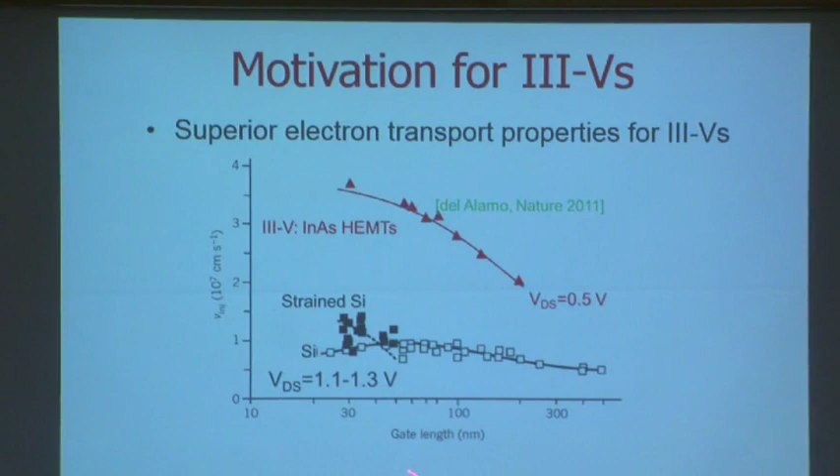Arsenic-containing III-V semiconductors are famous for their superior electron transport property. In a modern deeply scaled transistor, in the perspective of transport, what really matters is the so-called source injection velocity. Professor del Alamo summarized the source injection velocities for III-V channel transistors and strained silicon transistors in this graph. It shows that III-V transistors can deliver more than 2 times the source injection velocity at a reduced voltage. That makes it a very promising candidate for high performance and low power applications.

The device used for the III-V transistor study here is called indium arsenide HEMT. Indium arsenide or indium gallium arsenide are examples of very high mobility III-V semiconductors. HEMT here stands for high electron mobility transistor. It is a type of field effect transistor architecture that has a very similar operation principle as a MOSFET.

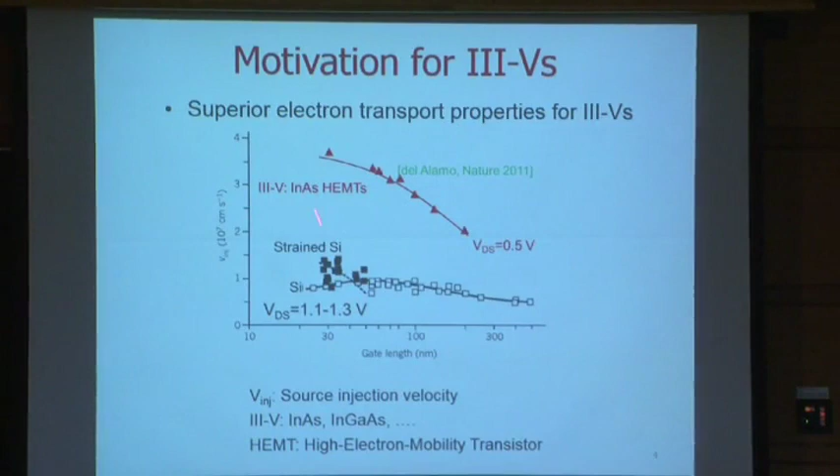Our MIT team has a rich technology heritage in HEMT research. Our alumni have scaled down the HEMT gate length to 30 nanometers, and it was those devices that were used for the study here. But despite the great success as a learning platform for device physics, the HEMT itself cannot be used as a CMOS logic device directly. The reason is here.

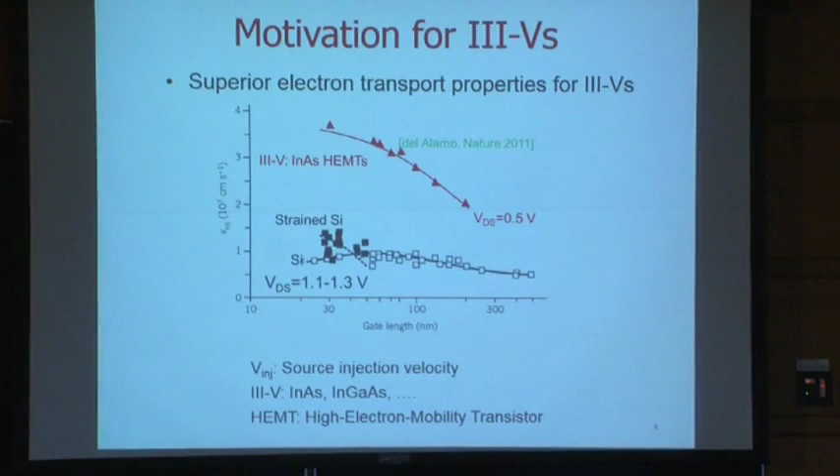Here I show you what a HEMT device looks like. It has a big mushroom gate sitting on top of a wide bandgap semiconductor barrier. It's a so-called Schottky gate. It leaks a lot of gate leakage current.

And the removal of the semiconductor around the gate region is using selective wet etch, leading to a long undercut. The fabrication of the gate stems and the contacts uses gold-based material, and they are using lift-off to make it. And these two components are not self-aligned. So it yields a long device footprint, for example, 2 micron here.

Just as a comparison, here I show you how a modern VLSI device should look. This is an Intel 32 nanometer transistor. Within 100 nanometers device footprint, you will find the self-aligned source/drain, the spacers, and the gates. So if you want, you can put 20 of those devices just at the access region of the HEMT.

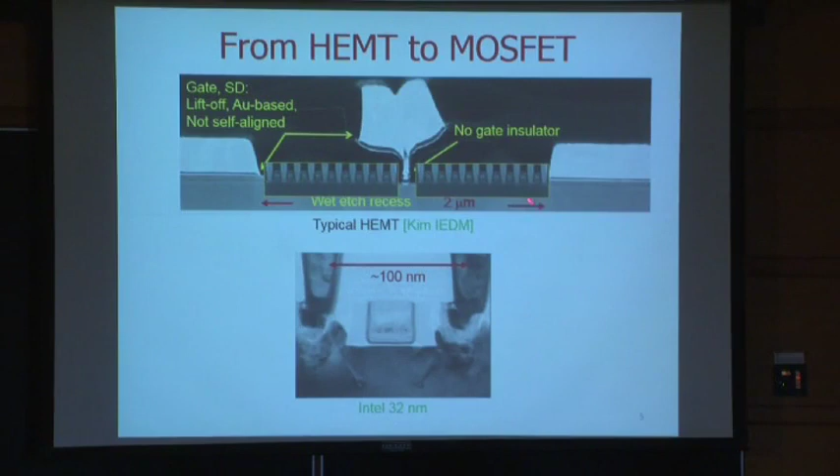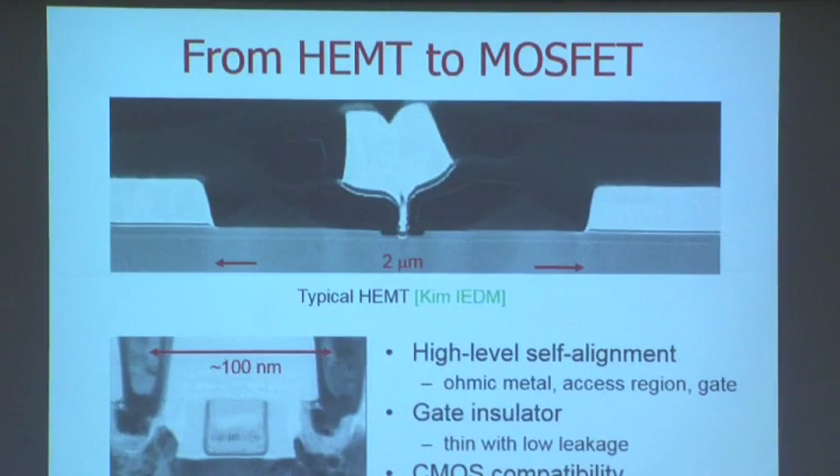So when I came to MIT in 2009, in my first meeting with my advisors, the following thesis goal was proposed by Professor del Alamo. We want to make a III-V device look as much like silicon as possible and feel as much like silicon as possible, but with competitive performance. In order to realize this goal, we want to fully leverage our technology advantage on HEMT research.

For this, let me bring you back to these 2 figures again and identify the key changes we need to make this III-V device look like the one below. First of all, we need to use a high level of self-alignment. We cannot afford to have separate masks for the front end. The ohmic metals, access region, and the gate have to be aligned to one single mask.

Here, I start to have a change of terminology from the silicon convention to the III-V convention. Ohmic metal here is an analogy to the source/drain of a silicon transistor. Access regions are equivalent to the spacers, and the gate is the gate. We also need to integrate a high-quality gate insulator to suppress the leakage current through the Schottky gate.

We also need to scale this dielectric down so that the device will have electrostatic integrity when it scales to small dimensions. And we need to fabricate this device using a CMOS-compatible process because this is targeted for CMOS applications. And for this, we cannot use wet etch and lift-off because wet etch will result in a long undercut. And we cannot use gold either because it's not a CMOS-compatible material.

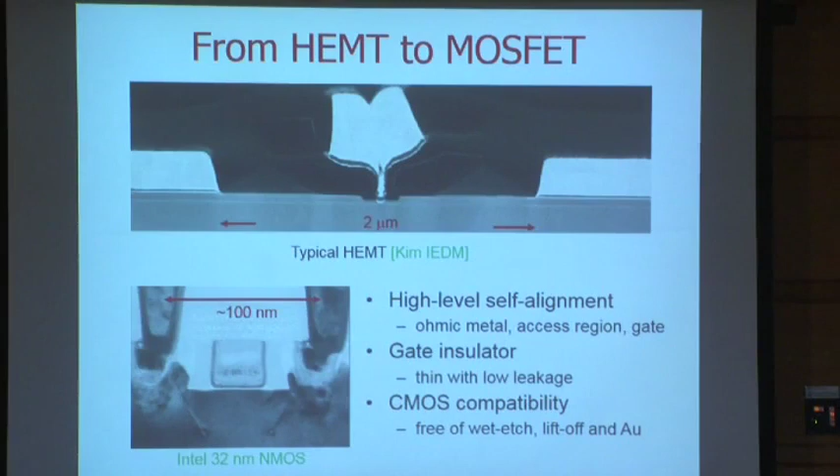So in order to realize those goals, we designed a very special device architecture and fabricated it with a contact-first, gate-last process, which I will discuss in the next section. First of all, I will give you a process overview of how we make this device. The starting heterostructure is grown by MBE from a commercial vendor on the indium phosphide substrate. We carefully design these heterostructures so that we will work with degrees of freedom for our process.

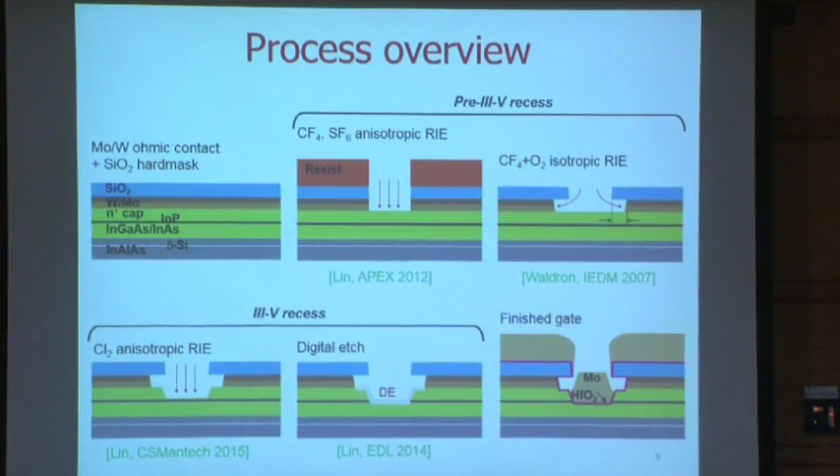And there are a few heterostructures we have grown in the past few years. The one that yields the most successful device has a structure that looks like this. It has indium gallium arsenide, indium arsenide quantum well channels. The total thickness is about 10 nanometers. And on top of it, there's a thin indium phosphide, etch markers for etch stop calibration, and N+ cap. When we receive this wafer, we cleave it into pieces.

And then the first step in MTL is to deposit the ohmic metals, which are tungsten, molybdenum, and a silicon oxide hard mask. I will tell you later why we need the 2 layers of ohmic metals here. Then we perform gate lithography to define the intrinsic region. Using electron beam lithography, we can define this gate line as small as 20 nanometers, which you will see later too. And then we etch the silicon oxide and the ohmic metal, stopping on the III-V.

And then we remove the resist and change the recipe to an isotropic RIE. This allows us to pull in the ohmic metal with respect to the silicon oxide gate edge here, and this is the formation of the access region. Then we perform the III-V recess. This is a new invention in my thesis, and I will tell you more detail of this process.

Basically, you have 2 steps. One is the chlorine-based RIE to partially remove the semiconductor, and then a digital etch to finally reach the surface you want to stop on. Immediately after the last cycle of digital etch, a fresh semiconductor surface is open, and we load it into an ALD system that deposits the high-K dielectric.

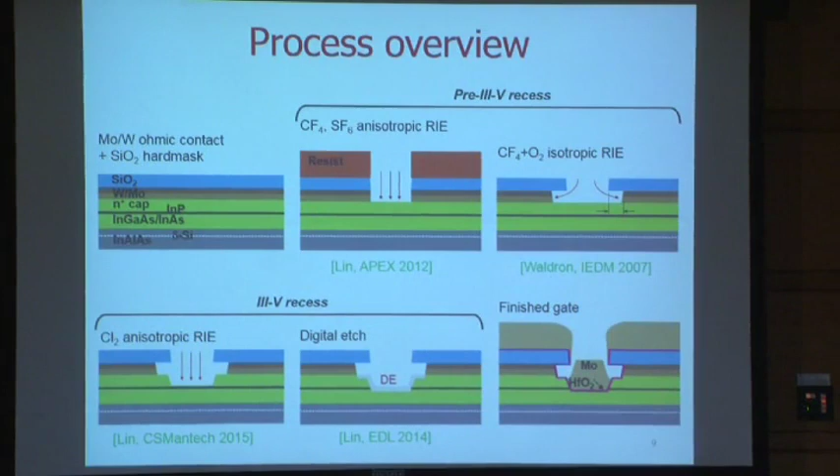After that is the gate electrode evaporation, followed by patterning. Until now, the front-end device is completed. You can see that we only use 1 mask and define all the critical features in this transistor. And after that is the back-end process, which is the via opening and metal line routing. They are not shown here.

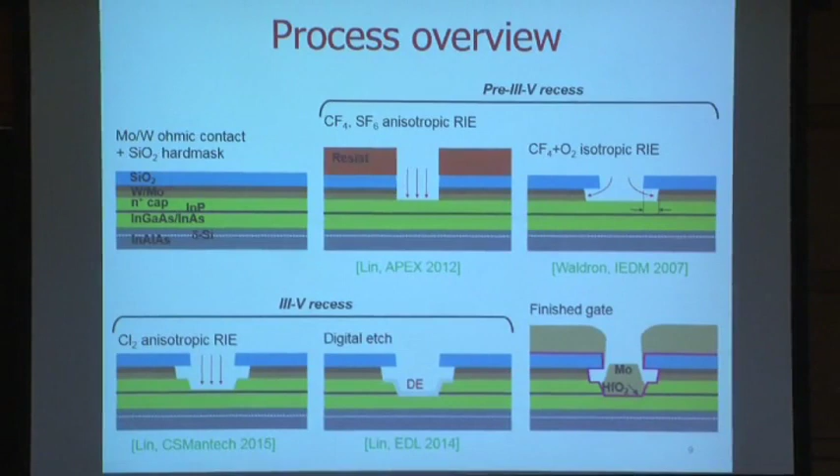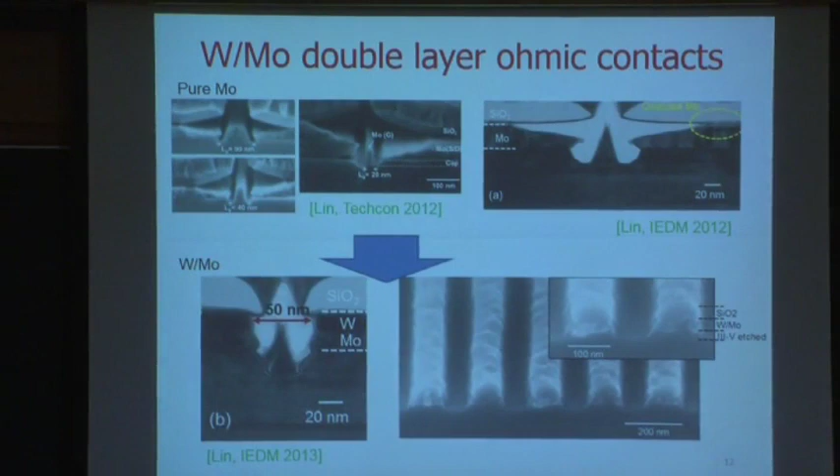Our alumni has developed a very nice refractory metal contact technology on N+ indium gallium arsenide. And in my first generation of device, I adopted that technology and used one layer of moly as the ohmic contact. As you can see, I can scale down the device gate length to a very small dimension, something like 20 nanometers, as early as 2012. But the problem is, we observe a long lateral undercut on the ohmic region here.

We later understood the reasons for this undercut from a TEM. As you can see here, the top layer of the molybdenum was oxidized during the CVD oxide deposition. And this moly oxide was easily attacked by the fluorine-based RIE used to etch the molybdenum in this region. So this results in a long undercut. We explored a few solutions for this problem. The one that works the best is using a very thin tungsten barrier between the molybdenum and the silicon oxide.

As you can see, this device, after adding this tungsten barrier, results in a relatively straight sidewall in the ohmic contact. This allows us to make the contact-to-contact spacing as small as 50 nanometers. So this is a critical technology allowing us to achieve a very small device footprint and also make a tight pitch pattern, for example, the one like this. We use this technology to fabricate tight pitch MOSFET arrays, which you will see later.

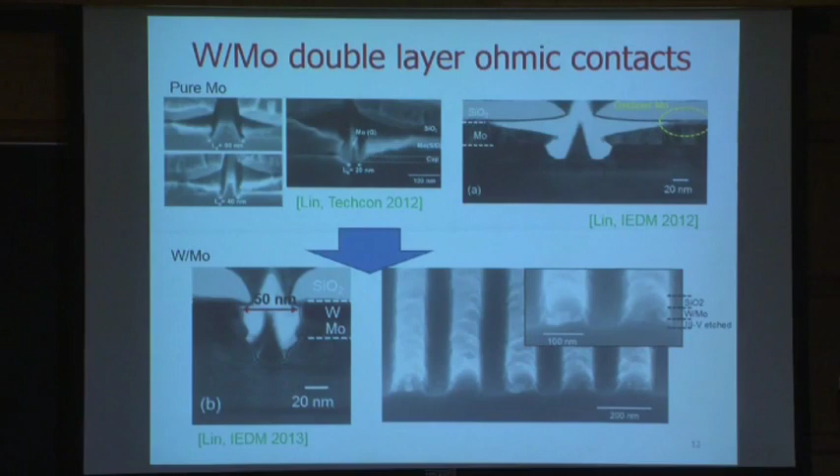Next, I will discuss the recess module. Recess has the same meaning as etching. Pre-III-V recess here refers to the etching of silicon oxide and the ohmic metals. Here, I would like to particularly discuss one technology we developed, which allows us to control this access region in a very precise way.

As I mentioned before, the access region is equivalent to the spacers of a silicon MOSFET. As you can see, this is the spacer. Its function is to separate the gate and the source and drain silicides so that there's no leakage. So it has to be big enough to prevent any leakage path, but it also has to be small enough so that it does not consume any valuable device footprint. This device has a spacer of 15 nanometers. So how do we do it in our MOSFET?

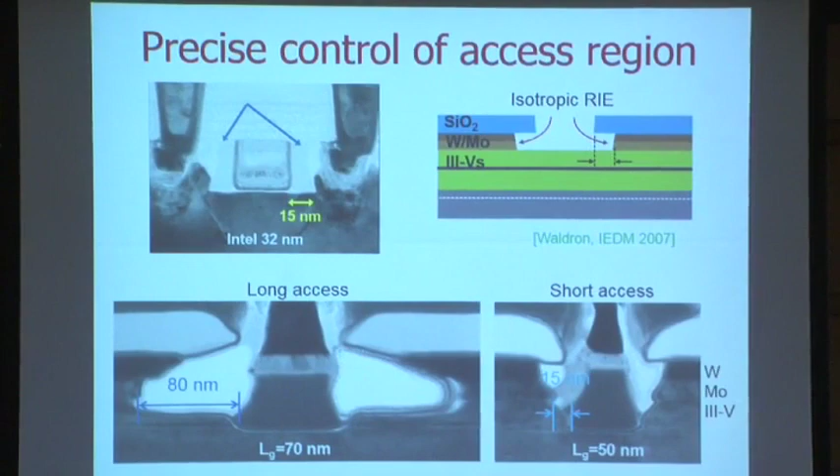We adopt a method first developed by our alumni, Dr. Waldron. The way to do it is using an isotropic RIE. It allows us to selectively etch the ohmic metals, but not the silicon oxide on the III-V, in an isotropic way. By timing this etching, it results in air gaps, as you can see here. And then the gate is put on later, self-aligned to the silicon oxide. Then this air gap will be the spacer, or the access region.

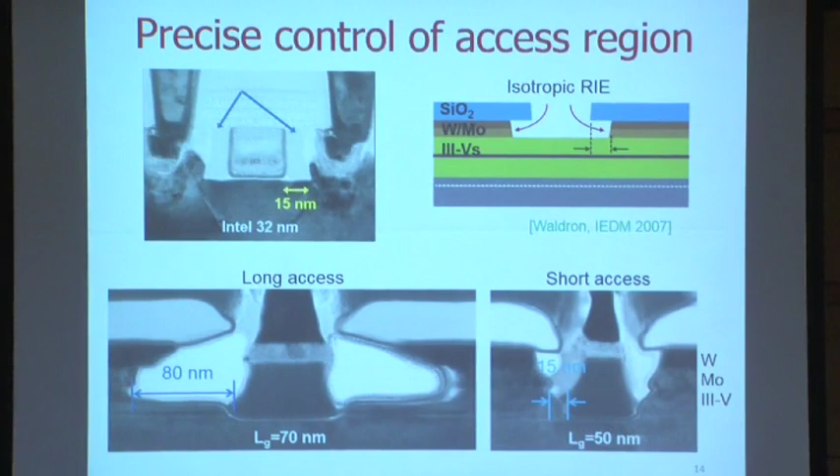Here I show you two examples of this device we have made. For a longer RIE process, we end up with a longer lateral etching, and this is a long access device. And we also tried to explore how small we can make this access region. The best one I can make is 15 nanometers, matching the dimension of a modern silicon device. And this very precise lateral control of the access region also motivated us to think if we can put another device identical to this one right next to itself. This leads to the fabrication of tight pitch MOSFET arrays.

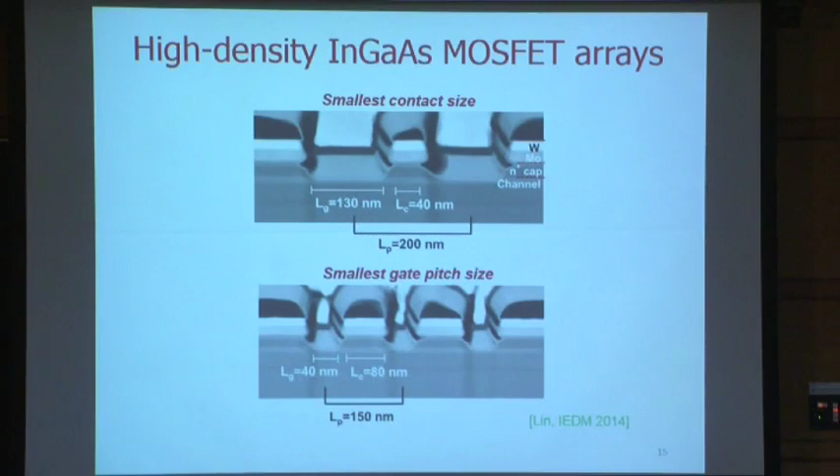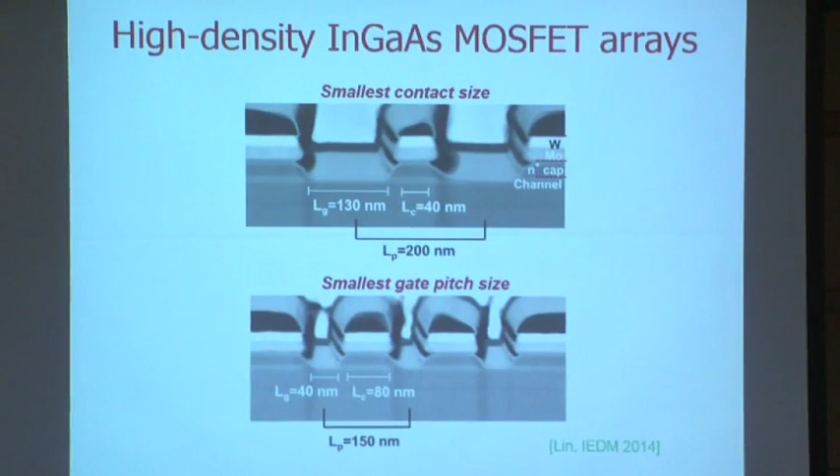And let me tell you that this process is easily integrated into a standard III-V MOSFET fabrication and is fully operational. So by carefully measuring and modeling such a device, you can actually study the nanoscale contact behaviors of such a technology. More details are discussed in this paper. Now I would like to move on to the III-V recess technology. As I mentioned, this is a new invention in this work.

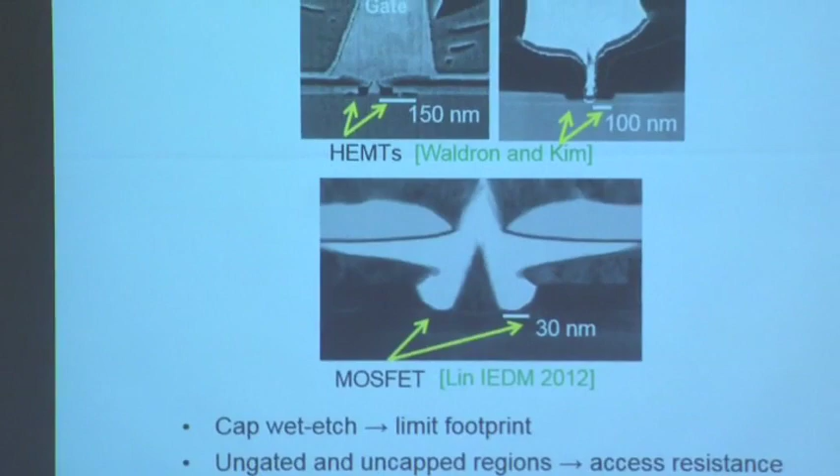Let me first tell you why we want to invent something new instead of using something conventional. Conventionally, the III-V recess in HEMT fabrication uses selective wet etch. As you can see in these 2 devices, it results in a long undercut. For example, it's above 100 nanometers for these 2 devices.

In my first generation of device fabrication, I tried very hard to see what is the minimum we can get by controlling the wet etch time and the solution. Here I show the best I can get is 30 nanometers. But even so, when I presented this device outside, it was still criticized for being an underlap device.

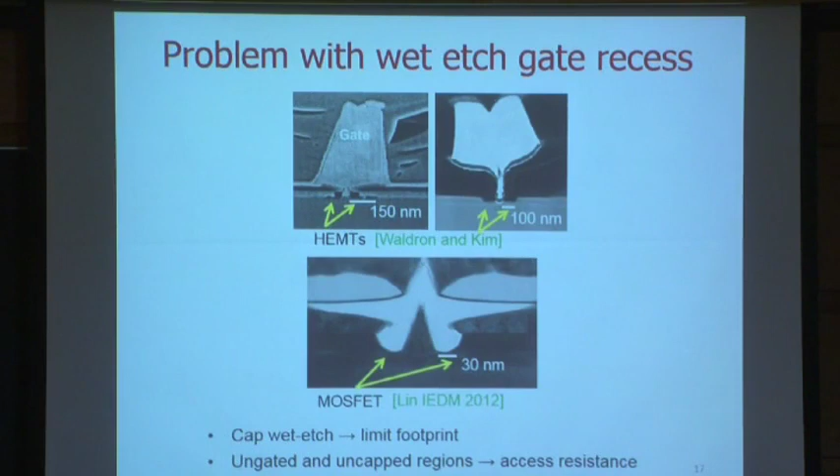An underlap device will consume valuable device footprint, and more importantly, this region is ungated, the gate is not covering, and it's uncapped, the N+ is not reaching here. So it results in a large increase of access resistance. So to solve this problem, we thought very hard about the alternative, and eventually we developed an alternative in this way.

We first use a chlorine-based RIE to partially etch the cap. It results in features self-aligned to the silicon oxide mask here. By carefully tuning this RIE, we can end up with a very smooth surface. And the etch depth is not very critical because later we are going to use a digital etch to gradually find the final terminating surface you want to stop at.

The digital etch technique used here comprises 2 steps. The first one is low-power oxygen plasma to oxidize the III-V surface and form a native oxide. Basically, this is the etcher. The second step is to use diluted sulfuric acid to remove this native oxide. Both of these processes are self-limiting, resulting in about 1 nanometer of material removal per cycle. And the ending surface is relatively flat, qualified for most applications.

One very critical problem in this process compared to a wet etch is that it doesn't have selectivity. Both processes etch the semiconductors of those layers at a comparable rate. This is a problem because if you cannot find the ending surface, it will not be useful. So we developed techniques to calibrate this etching, a fast and accurate calibration allowing us to pinpoint the top layer of the indium phosphide.

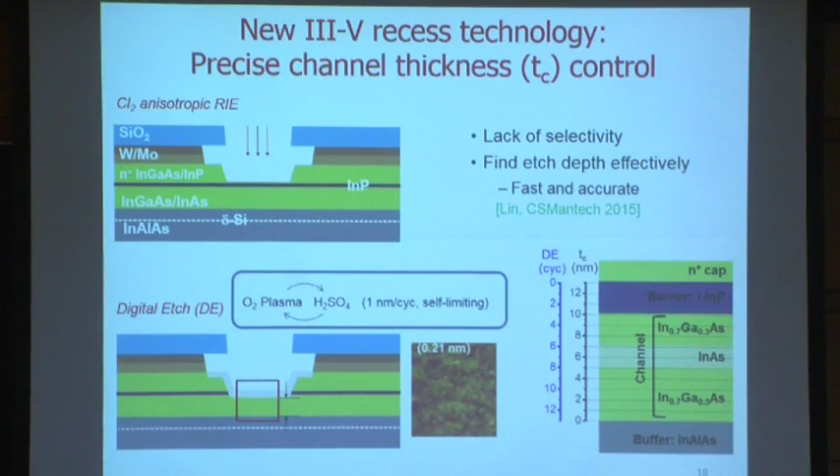This basically makes use of the wet etch selectivity of indium phosphide and indium gallium arsenide against a certain wet etch recipe. The detail is discussed in this paper. If you can pinpoint the indium phosphide, then you have the freedom to control the depth by using a digital etch. As a proof of accuracy, I show you 2 devices here, fabricated on the same heterostructure. As you can see, the grown channel is 10 nanometers in the unetched region.

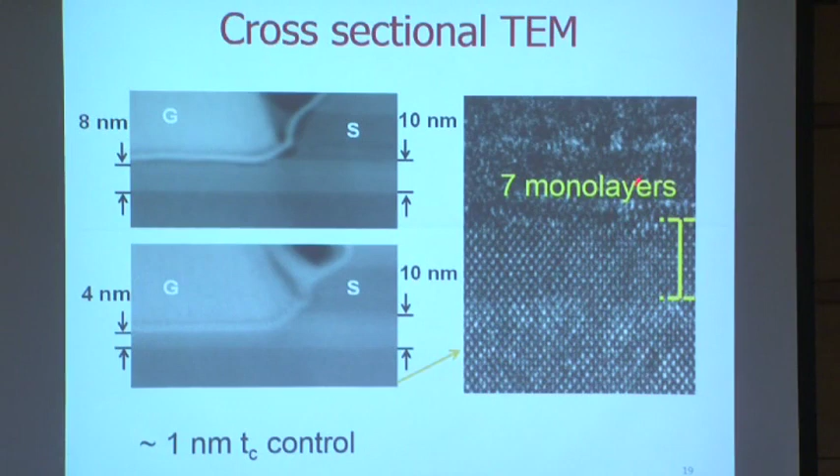By using different combinations of dry etch and digital etch, you can end up with different thicknesses in the intrinsic gate regions, 8 nanometers and 4 nanometers, as shown. If you zoom in to the 4 nanometer channel intrinsic region, you will see exactly 7 monolayers of atoms left behind, proving the accuracy.

Now we have the contact, we have the recess. The last ingredient to make a MOSFET is the gate stack. We have gone through several generations of gate stack engineering. The first generation used a relatively conservative design, a thick aluminum oxide on thick indium phosphide, resulting in an EOT of 3.5 nanometers. EOT stands for equivalent oxide thickness. It's calculated from the physical thickness of these 2 materials and their dielectric constants.

I was very excited when I got this device because it was the first decent working device after 2 years of process development. And more excitingly, this device has a very low leakage current, allowing us to scale the EOT down. In the next generation, we fabricated a gate stack like this. We use a higher-k material, hafnium oxide, on top of a thin aluminum oxide on the indium phosphide. The indium phosphide is also scaled down, resulting in an EOT of 0.9 nanometers.

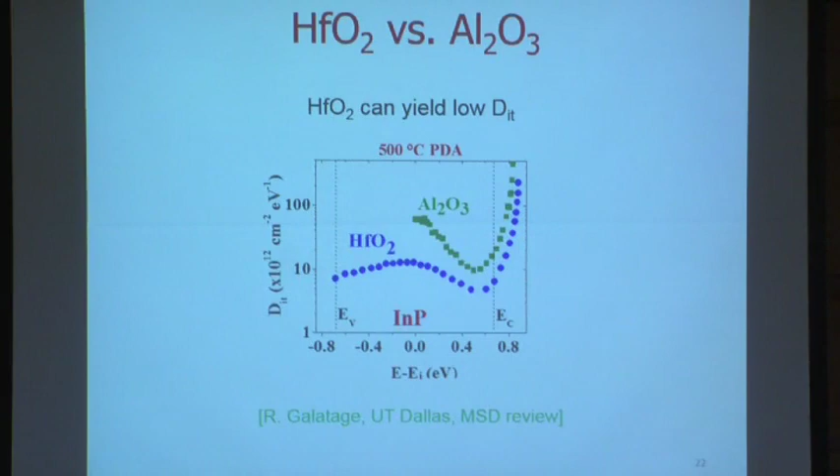This research has greatly benefited from multi-university collaborations. Here is one example. In the MSD review, we learned from our colleague from UT Dallas that hafnium oxide itself can also form a very good interface on III-V. So this information was quickly fed back to our fabrication. And then in our next generation, we removed the aluminum oxide interfacial layer and directly put hafnium oxide on indium phosphide. The resulting EOT is reduced to 0.6 nanometer.

Now coming to the next generation, we want to solve another problem, which is that all VLSI devices are surface channel devices. The invention of our new III-V recess technology allows us to stop at any III-V surface that we want. So we can remove the indium phosphide by using digital etch, and then we directly put hafnium oxide on the InGaAs channel. Here resulting in another EOT reduction.

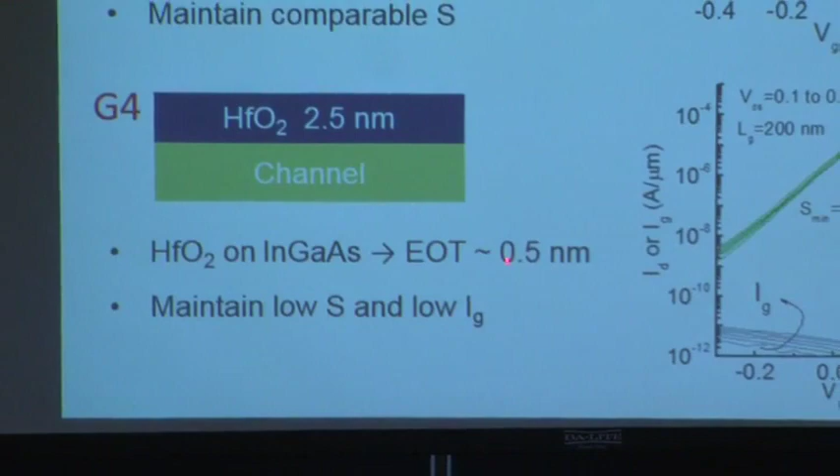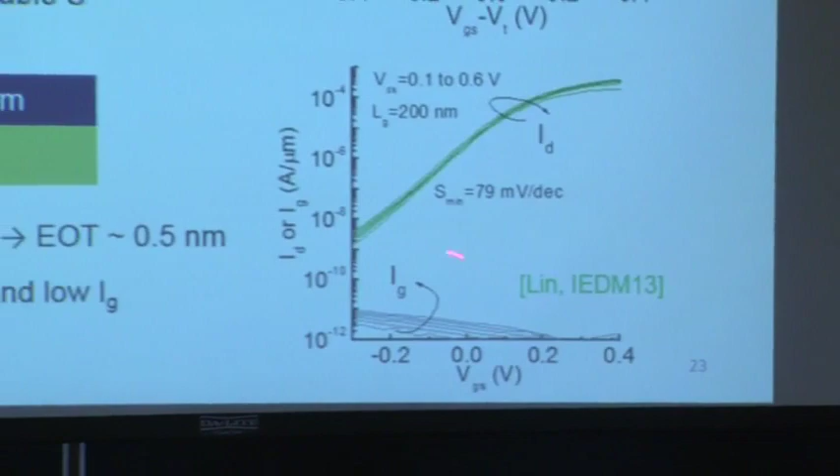Even though we have used dry etch in the intrinsic regions extensively, you can see that this device still results in relatively good subthreshold swing and high drive characteristics. Also, the gate leakage current, even though we use a very thin EOT, is still very good. So this is our latest technology in gate stack.

Just as a recap of the fabrication technology. In the quest for higher device performance, we persistently introduce new features to our fabrication. Over these years, we have performed 4 generations of intrinsic engineering, which bring down the EOT to 0.5 nanometer. And over these years, we used 4 generations of extrinsic engineering and brought down the source resistance to 100 ohm micron. Since this is my 6 years at MIT, on average, each generation is taking about 18 months.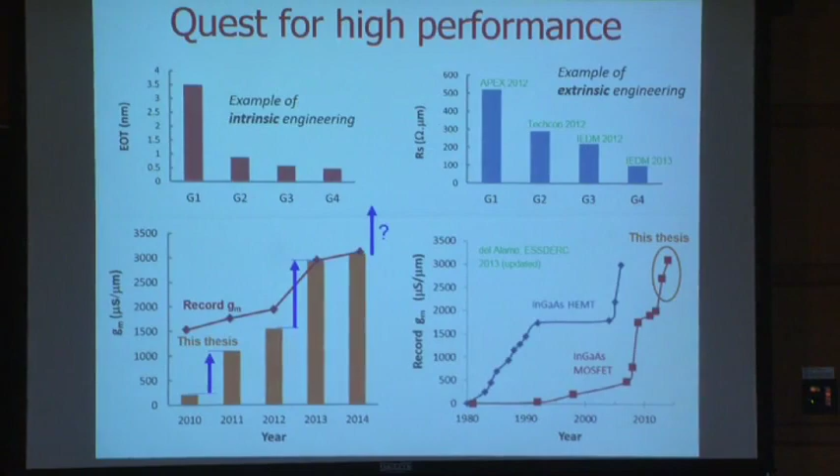Another thing worth noticing is the comparison with indium gallium arsenide HEMTs. You can see that indium gallium arsenide HEMTs have led this performance since 30 years ago. It was only last year that our device surpassed their performance. And I believe this is just the start. The potential of the InGaAs MOSFET has not been fully unleashed. Probably very soon you are going to see another big jump in the performance of InGaAs MOSFETs.

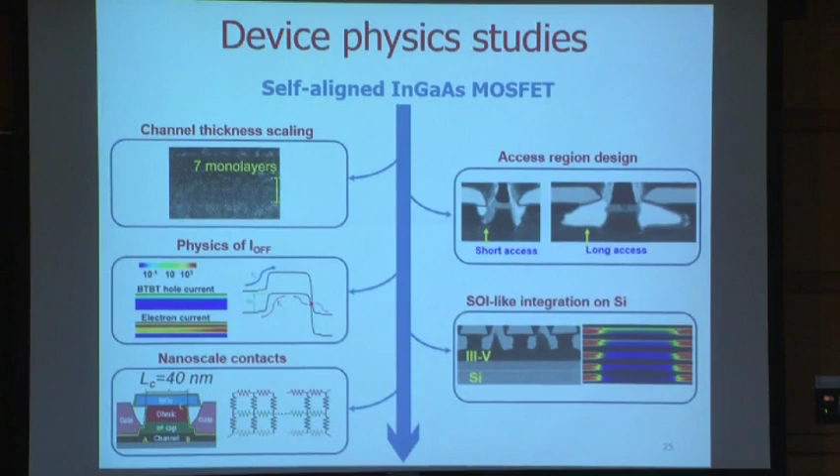The device technology developed in this work also allows us to explore some unknown device physics that are relevant to the operation of III-V MOSFETs. I have done several studies in my thesis, and here is a list of them. Because of time, I do not have enough time to discuss each of them in detail. So I'll briefly tell you what I have done for 2 topics here. The first one is the study of the impact of channel thickness scaling on device performance.

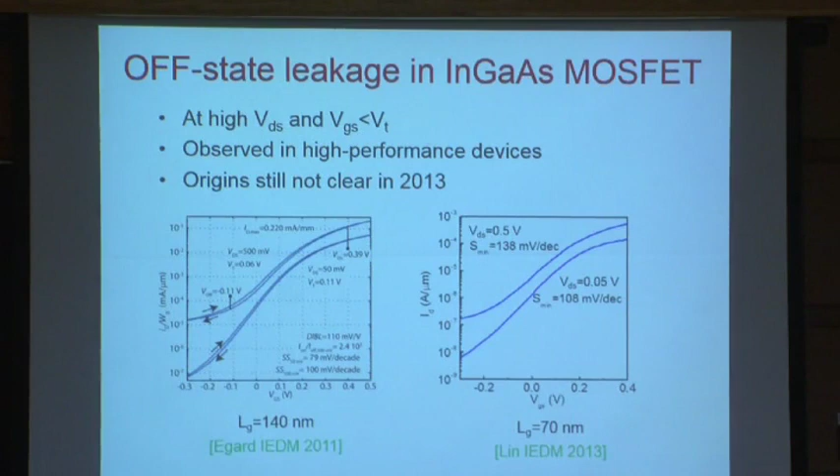You will see that this excess off-state leakage current at this bias condition happens in almost all high-performance InGaAs MOSFETs. Two examples: one is made by Lund University, in this region. Another one is made by myself, in this region. The origin of this off-state leakage current was still not known in early 2013. So our high-performance devices made in 2013 gave us the opportunity to explore this physics.

So what we do is, just like detectives, unpeel the onion layer by layer. We first isolate the effects from the buffer leakage and the gate leakage. And then the next thing we want to isolate is the Fermi level pinning due to DIT. For this, we performed low temperature measurements.

You will see that the subthreshold swing of those devices approaches its ideal value when the temperature cools down to 150 K. This N is defined as the experimental subthreshold swing over the ideal subthreshold swing. If it approaches 1, that is ideal. And it indicates that DIT is frozen at low temperatures. And you are going to see the patterns follow the classical GIDL, which you will see in the textbook. GIDL stands for gate-induced drain leakage.

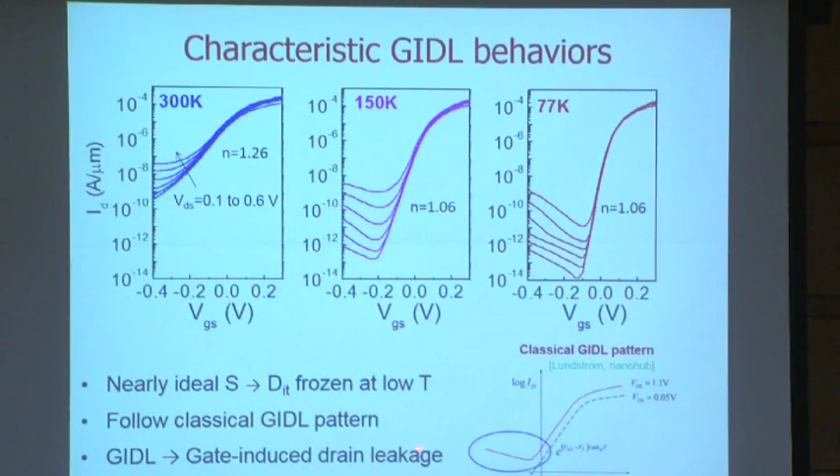Here I explain to you what GIDL is. Classic GIDL happens because you bias the gate at a negative voltage and your drain at a positive voltage. It creates a high E-field region at the gate edge close to the drain. Because of this high E-field, it bends the band and allows a valence electron to tunnel through, and then this electron is collected in the drain. And the hole left behind will diffuse to the source. This constitutes the band-to-band tunneling current.

So we performed bias and temperature dependent studies on this off-state leakage current. It really reveals the characteristics of band-to-band tunneling. So this is the first unambiguous evidence to identify that BTBT is really the triggering mechanism. But is the IOFF entirely due to BTBT? This is the second problem. This is what people really thought in the last years. And we find counter evidence here.

If this current is entirely due to BTBT, BTBT happens only in the high E-field region, so it's a very localized process. So it should not have a dependency on the gate length. But we find a very strong gate length dependency in our off-state leakage current, as you can see here. So it indicates something else is happening. So what is that?

So we found later that this is due to a parasitic bipolar transistor. The operation is shown here. As I mentioned before, the holes generated due to BTBT have nowhere to go because this is a floating body channel. They have to go to the source. And when they go across the source-to-channel junction, this junction barrier has to be lowered, which allows a flood of electrons. This constitutes a large electron diffusion current.

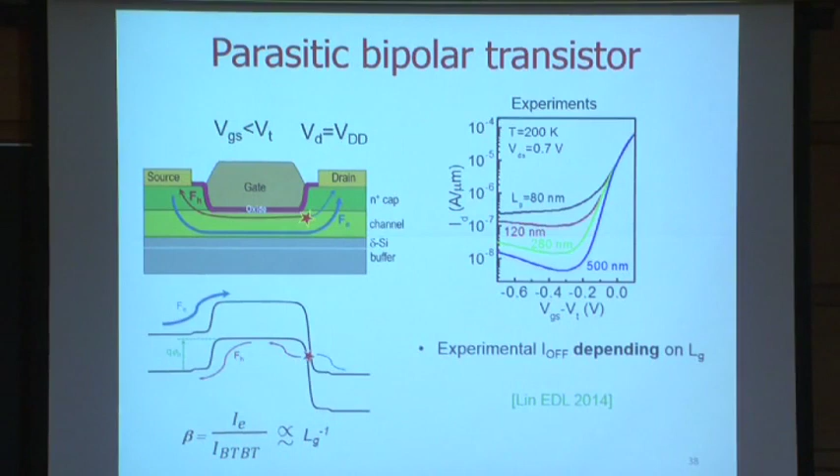And actually we find this dependency embedded in the off-state leakage current observed in this graph. The detail is discussed in this paper. We can even pinpoint the base width modulation from this off-state leakage current in our experiment. Then we later developed models to understand this better. Here is the experiment we observed in our device, and here is the TCAD model we built to understand it. You can see that they end up with a very good match.

There are a few points to take note of here. If you exclude BTBT, then the transistor will just turn off nicely, as shown in the green curve. That indicates BTBT is really the triggering mechanism. Secondly, if you examine the current components in these regions, you will see that the BTBT current is only a very small fraction of it. The majority current is the source electron diffusion current. The gain is about 700.

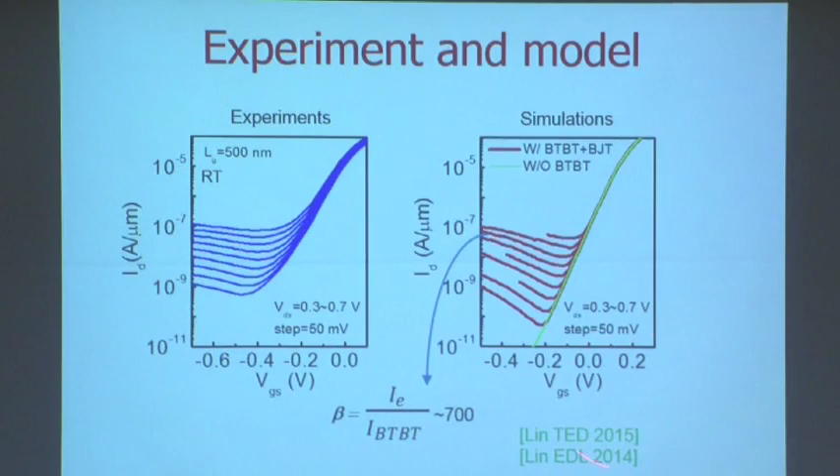This simulation also allows us to explore design considerations to reduce this off-state leakage current. Due to time, I will not discuss it here. As extended reading, you can refer to those two papers. So here I come to my conclusion.

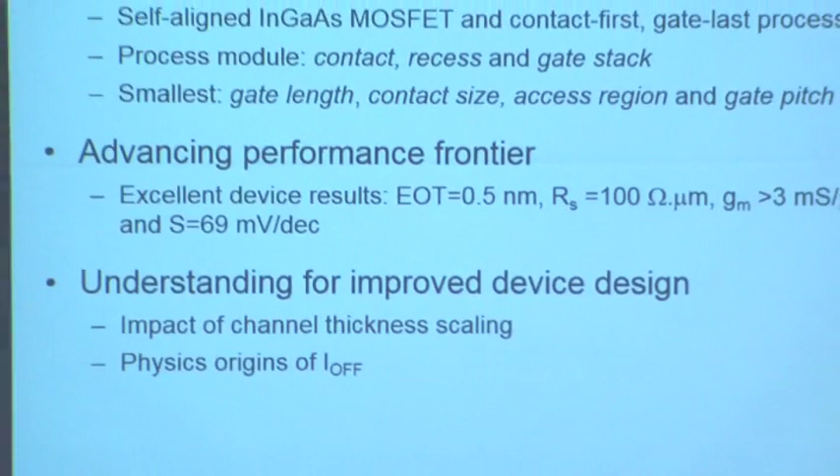Starting from HEMTs, we wanted to take advantage of the HEMT technology we have at MIT. We designed a very special self-aligned InGaAs MOSFET architecture, and fabricated it using a contact-first, gate-last process. Over these years, we persistently introduced new features to our process module, including the contact, the recess and the gate stack. From those, we achieved devices that we can claim are the world's smallest: the smallest gate length, the smallest contact size, the smallest access region, and the smallest gate pitch.

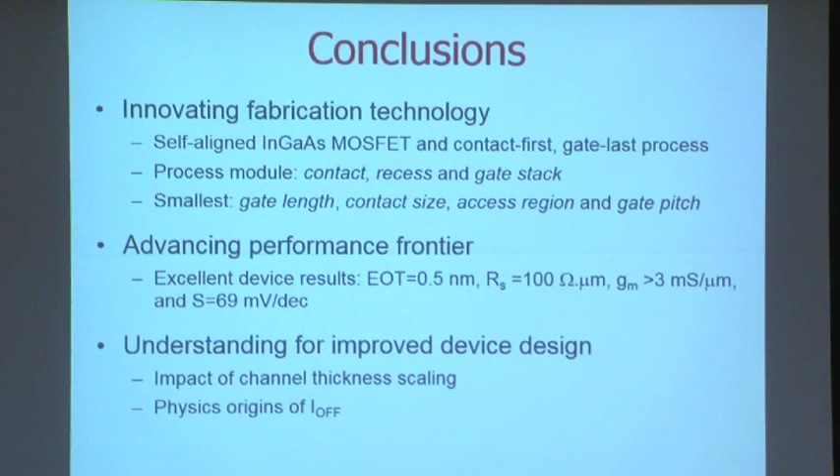Due to these advances in fabrication technology, we're also advancing the performance frontier of InGaAs MOSFETs. We have achieved certain very impressive figures of merit. We have achieved an EOT of 0.5 nanometer, a source resistance of 100 ohm-micron, and a record transconductance above 3 millisiemens per micron, the first time in an InGaAs MOSFET, or in any III-V field effect transistor. We also achieved the second best subthreshold swing, 69 millivolts per decade.

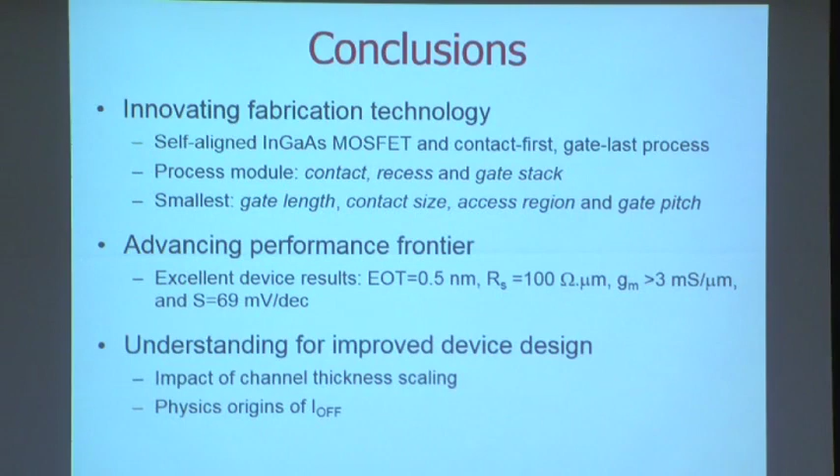The advance of the device technology also allows us to study some underlying physics in III-V MOSFETs. I give you two examples here: the impact of channel thickness scaling on III-V MOSFET characteristics, and the physical origins of the off-state leakage current in high-performance InGaAs MOSFETs that has bothered the community for a long time.

Here are some future works that I will propose for this project. First of all, I've placed relatively less emphasis on interfacial characterization in my thesis. I was asked this question many times at conferences and in emails, so this is a very important question. Given that our intrinsic gate region has been subjected to many RIE processes but still maintains very good electrostatic integrity and subthreshold characteristics, this is a very interesting problem to explore.

But due to our very special quantum well architecture, we will need to carefully decide the layout and the devices to be tested for this study. We also need to develop some new models. For this, a new model developed by Warnock before is the first step to explore this problem. And there's a second problem.

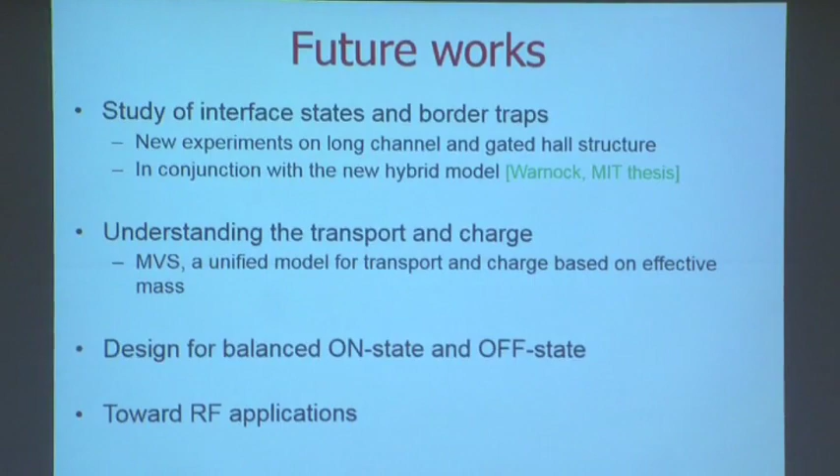Recently in the community, there's increasing discussions about the charge control in the III-V channels versus its transport property. Because of the low density of states in the III-V, this might dilute the advantage of the high transport property of this material system. Most of those works are theoretical, so I have a feeling that the experimental work on this subject is lagging behind.

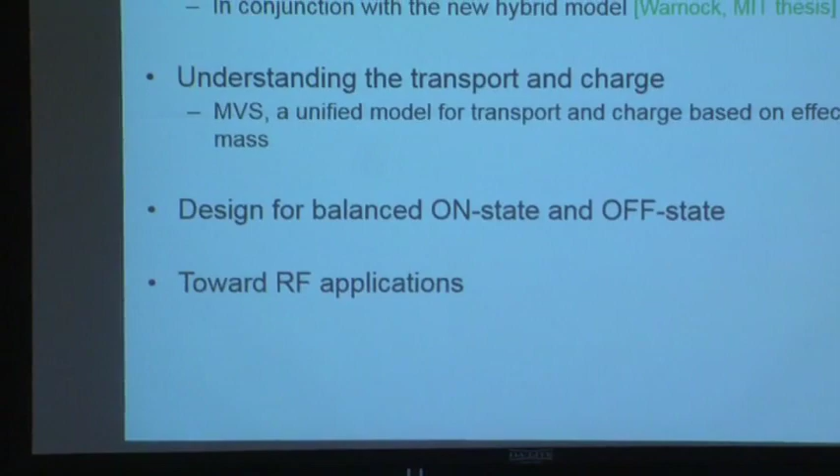To address this problem, a very good starting point is looking at the MIT virtual source model, MVS, developed by Professor Antoniadis. This is a unified model for the transport and charge based on the concept of effective mass. So I think some beautiful experiments can be derived from this MVS model's concept and our device technology developed here. We can also explore in our device some underlying device physics. This allows us to optimize the design of the III-V transistor.

Actually we have some preliminary ideas as to how we can reduce the off-state leakage current and increase the on-state current in our particular device structures. And lastly, as I discussed before, compared to HEMT, the MOSFET is free from the gate leakage problem. We can scale the EOT so much thinner and place the N+ source and drain so much closer to the gate. So I think that the potential of the InGaAs MOSFET has not been fully unleashed.

Whatever a HEMT can do, I think a MOSFET can do even better. So it allows us to explore the potential applications of a III-V MOSFET in the domains that were previously dominated by HEMT, for example, RF applications.